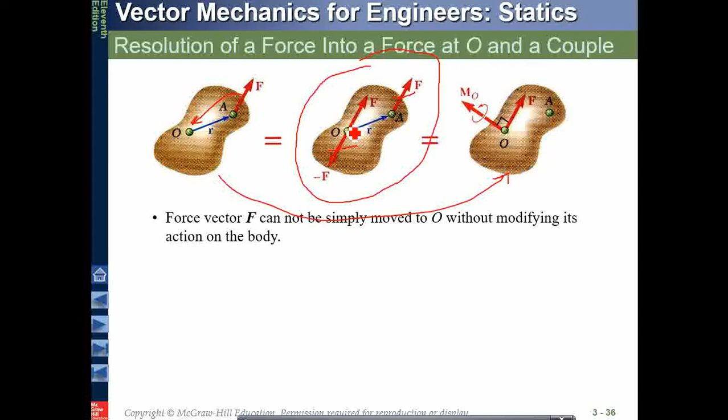But what is the other effect when we have moved the force from here to here? We have to add a moment here also. How is the moment added? F cannot simply be moved to point O without modifying its action on the body.

Attaching equal and opposite force vectors at O produces no net effect on the body. So what do we have to do further?

The three forces may be replaced by an equivalent force vector and a couple vector, which is called a force-couple system. This is a force and a couple or moment, and this moment is created due to F times R.

Remember that whenever the moment couple is added, it should be perpendicular to the line of action of the force. When such a thing is happening, this should be perpendicular to the line of action of the force.

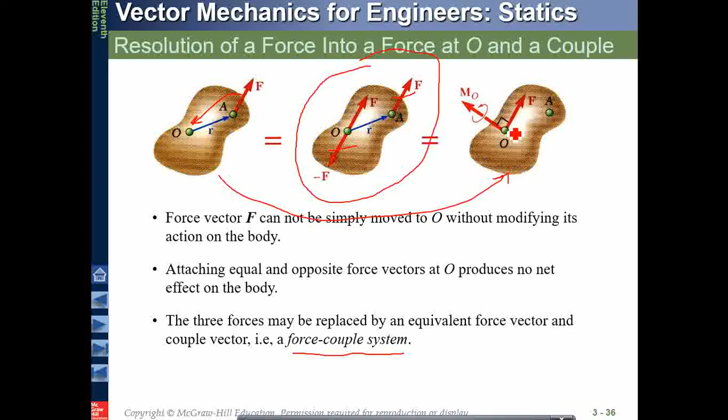Let's see how these forces and moments are generated. Moving F from A to a different location O requires the addition of a couple vector m0. So if you are moving this F to point O, you have to add a moment couple vector at point O, and this moment couple should be perpendicular to the line of action of the force.

Now if you wanted to move this system to location O dash, what do you need to do? When you move this system to O dash, both the force and the moment should move. The F will move directly from here to here, but this movement requires the addition of the couple system, since the force was here and there was no movement here before.

When we moved the force from A to O, we added m naught, and this m naught was the effect of this movement created by F times R. So this was the effect of that movement.

Now I want to move this O system, both of these, to this O dash. So what will be there? This force will be transferred here exactly, and this force will produce F times S, the moment here. So that moment should be added to this moment. And further, if you make different movements, that moment will be added together, and this moment is updated again and again.

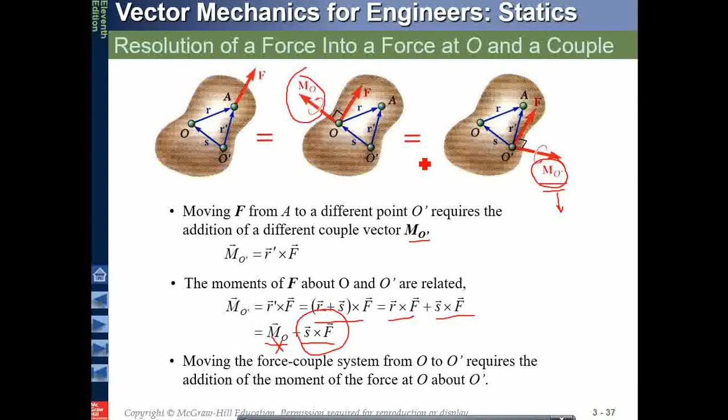We'll try to take a simple sample problem. With the help of this, we'll be able to understand different couple systems and moment systems. So this is one kind of a hinge, fixed at this point. These application problems that we are showing you are real problems - they are actually applied problems, and possibly they exist somewhere in your system around you.

Like this is a kind of hanger - you have seen different types of hangers. This is fixed at this certain location, and there are forces existing on this along this direction. You can expect this as the z direction; if this is x direction, this is y, this is z. This is also one direction - 20 lb force, 30 lb force there, 20. So these are the different forces connected on this hanger.

Determine the components of the single couple equivalent system shown in the figure. So in the figure we have seen these forces, these forces, these forces - many forces are there. What we need to do is combine these forces as a single force, single couple equivalent system.

So we wanted to move these forces to a particular point. What will be our strategy? We will find out ways to add equal and opposite forces in this particular diagram so that a couple is created. We will produce new couple moments and combine them into a single equivalent couple. How will we do that?

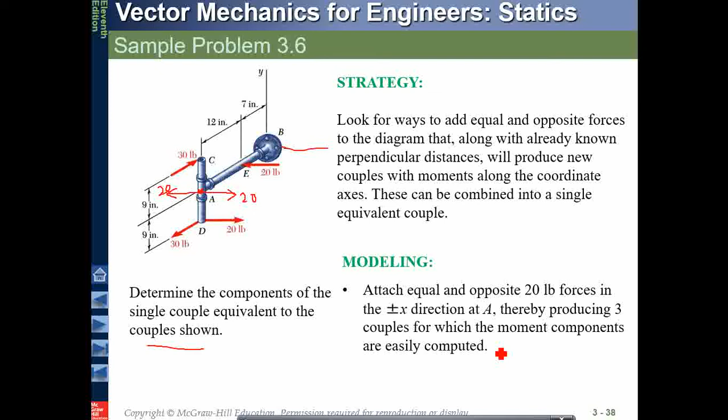So we will try to follow this strategy, and you can follow such strategies in other problems also. So just wait a moment - let's say this, in this now we will try to make different couples and write down the moment equations.

So the x component of the moment, Mx, is along the x, created by these two couples, 20 and 20. Remember that the moment comes up perpendicular to the plane. So if you see the yz plane - just check out, yz plane is this plane. On yz plane we have this couple, 30 and 30. So the combination of 30 and 30, 30 times 18, will give me a moment, and this is Mx because by creating this couple, this Mx component will be perpendicular to this plane, the yz plane. That's why this is Mx.

Further, if you see, my is along this, so for my we will be having a plane xz. In this xz plane, which couple vectors do we have? We have 20 and 20, so the distance between them is 12. We will take this as this, and my will be perpendicular to this. Mz will be along the z direction.

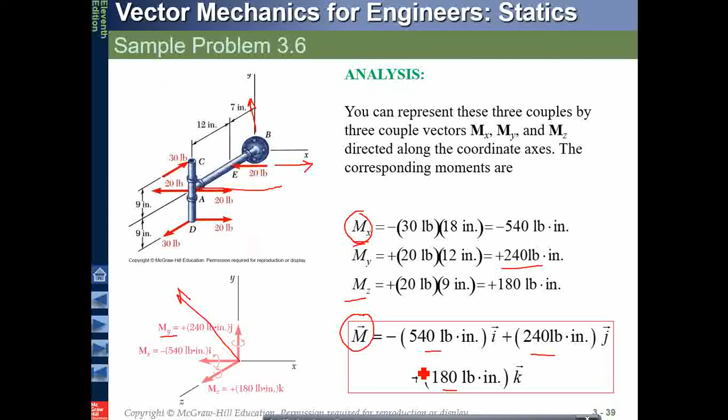We'll move forward, so you can try to check out with this also. You can also obtain the components of the equivalent single couple M by computing the sum of the moments of four forces at an arbitrary point. So you can calculate it not only using the couple method, but also using the simple moment method. For that, which point will you select?

Try to select point D, because you'll have less to calculate, since these two forces will be gone. There is no R here. The R for this and this is 0, so these two will be gone. You will only require the position vector from this to this, and this to this. So you find the different moments from these two forces, and you will be getting MD like this, and you will get the same moment vector. So we can obtain the moment using the couple method, or using the simple moment method which we discussed earlier.

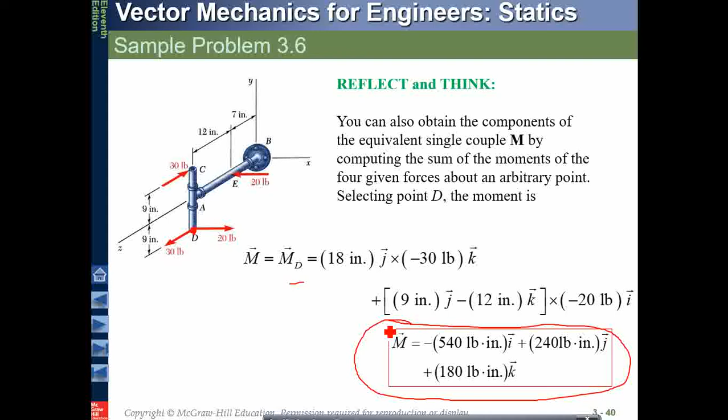Now, reduction of the forces to a force couple system. So if there is a body like this, and we have a fixed point O, and this point, this point and this point are at a distance of R1, R2 and R3. A1, A2, A3 are at distances R1, R2, R3. If we would like to move F1 to O, F2 to O, and F3 to O, we would like to move all these three systems to O.

What is required? We will put all these three systems to O without changing their direction, and we will add a couple to O, perpendicular to each force. F1 perpendicular to this, M1 is added; perpendicular to F2, M2 is added; perpendicular to F3, M3 is added, like this in this figure. So we have various moments M1, M2, M3 with different forces. Now it is important that these three force and couple systems can be equivalently added together. All the forces represent this resultant R, and all the moments represent this overall summation moment MOR, something very similar to what I have told you.

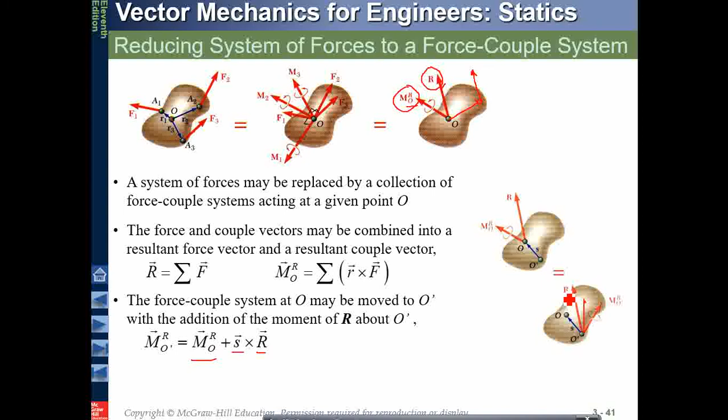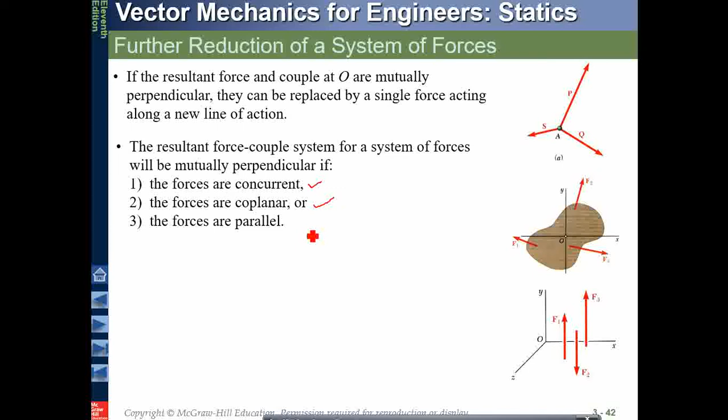Further reduction of a system of forces can be done. Remember, if the forces and resultant couples are mutually perpendicular, they can be replaced by a single force acting along a new line of action. This can be done only when the forces are concurrent, coplanar on the same plane, or parallel. This will be explained in the next slide.

For example, a system of coplanar forces can be reduced to a force-couple system at R, M0, which is mutually perpendicular. This M0 is perpendicular to R, but since this is 2D, you are not able to see the moment being perpendicular—only the orientation of the moment is the same. This R represents all three forces acting on this body.

This is done using rectangular coordinate systems. You can move the location from one point to another point, and that location will be M0 over R. We'll talk more about this in some numerical problems. So if there are many forces about a certain point, you can reduce that to a single force.

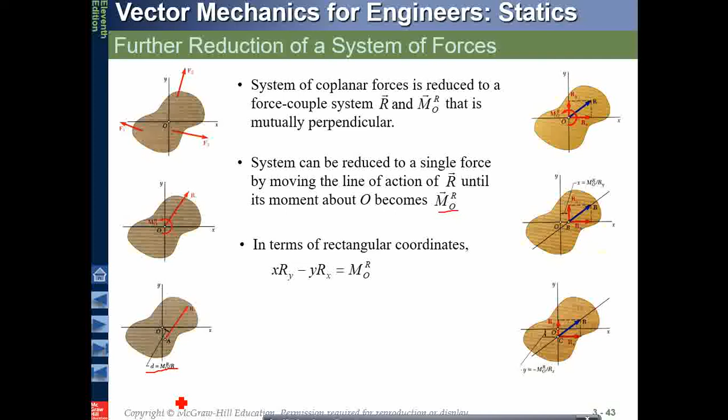So whatever we have learned till now, we will apply in this problem. Listen and watch this problem very carefully. This is the system. You might be given a different system in the exams, but the concept and overall procedure will be the same.

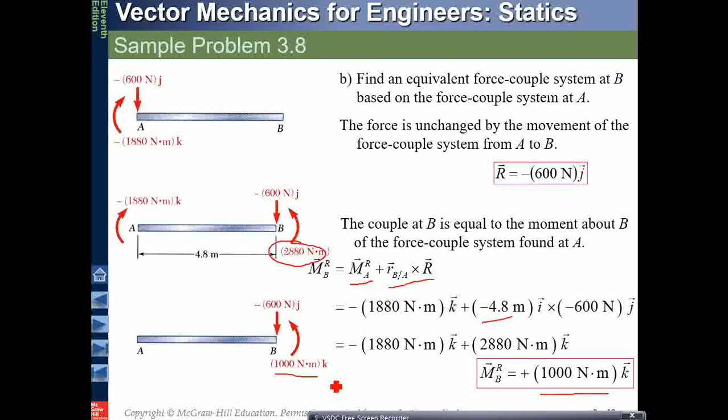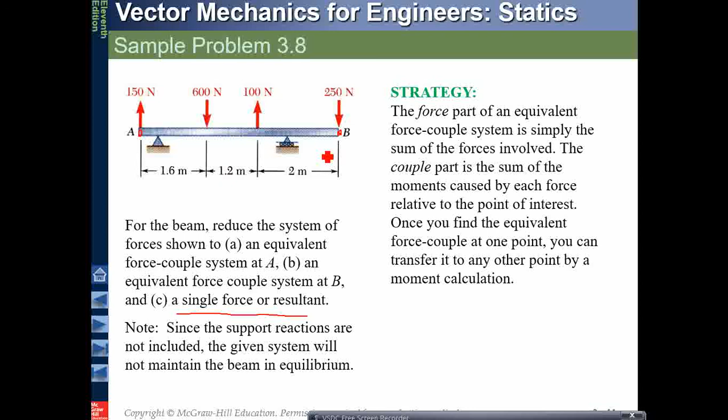Further, what is being said in the third part of the question is we need to find out a single force, or resultant system, at some location on this beam AB. So to do that, we need to know that the overall resultant force is R, and R may be anywhere on this beam AB. Let's say the overall R is at a distance of x, so x times R will be a moment, and what will be the moment? The moment at A.

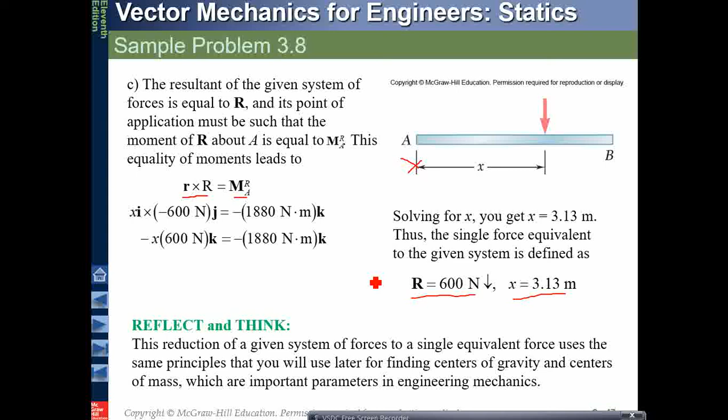So the moment at A, because we are taking the distance from A, we know that R times x is the moment at A. So with the help of this we'll be able to find out the distance. So this R will be an equivalent single force required on this beam AB at a distance of 3.13 meters from A. In this way we can find out the location of the resultant force also, and we can reduce our overall forces on the system to an equivalent single force. I hope you would have understood this problem carefully.

Further, we'll try to solve one more problem. This is kind of a bracket, and this is a very practical problem actually. You might have seen such brackets in your electrical distribution systems where your main line is coming. These types of sockets act as a live wire or a neutral wire sometimes, and from the live wire we have taken the supply, this may be going towards your bedroom, this may be going towards another room, kitchen, or somewhere else, and here the main power supply is connected. So this is the kind of bracket I'm assuming is happening, fixed at this location, and here the wires are moving towards your room or bathroom or kitchen or somewhere like this.

So the movement of the wire can be represented like this. Since the wire is creating a tension, this is exactly a force of 700 newtons. Similarly, another wire. So this is a 3D problem. It's important to notice that this is a 3D problem. This one is orienting in the XZ plane only, but at 45 degrees to both axes.

This is in the YX plane. This vector is in the YX plane, so this will create a moment in the Z direction. This one is in the ZX plane, so this will create a moment in the Y direction, and this one is also in the ZX plane, creating a moment in the Y direction.

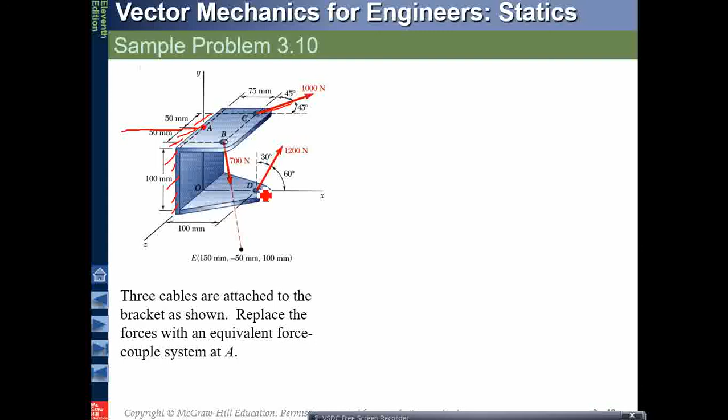RDA will be in the other plane. Which plane? The yx plane, so i and j is required. This one is in the xz plane, so i and k is there.

Okay, now we have obtained all the position vectors, but one thing is required till now. We know the forces here, we know the forces here, and we know the forces here, but the coordinates or the angle is not known here. So FB as a vector is required - we need to find out this force as a 3D vector.

So for that, like for example FC, this force, we can do it easily. 1000, x component will be 1000 cos 45, and through this angle the z component is cos 45 here also. In this case, the x and y component will be there, cos 60, cos 30: 1200 cos 60, 1200 cos 30. This will be the x and y component. So with this we can obtain FC and FD.

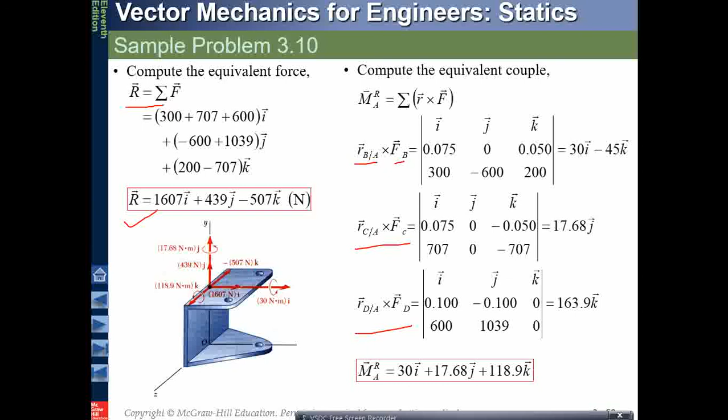So this is a typical three-dimensional problem that we have solved, and I hope that you would have understood this clearly, especially this 3D problem. This is a very important problem. In this problem we have approached various things.

We have approached the unit vector method also. We have seen how to find out the position vectors, and how to replace the forces and couple systems to a particular point. I hope this video would be informative to you, would be beneficial to you, and I hope to meet you in the next video. Thank you.